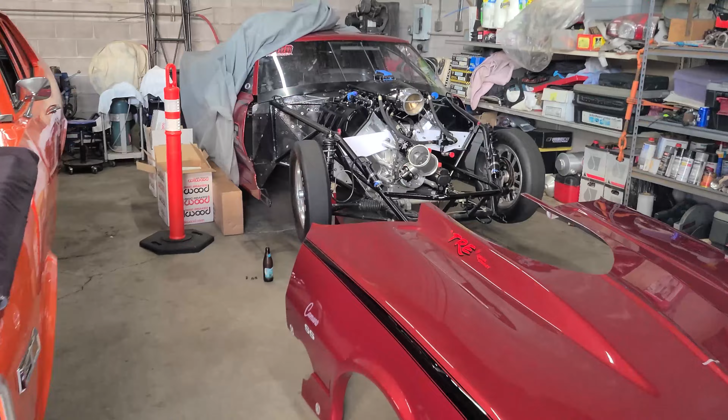All right, we're down at Royden's Auto Service, and the next project that we're going to do is make some motor plates. All right, let's see what we've got going on here. So it's just a small two-bay shop. He's doing some nice Wilwood brakes on an old Nova, and then our project back here is a little Brad Anderson motor going in a Camaro.

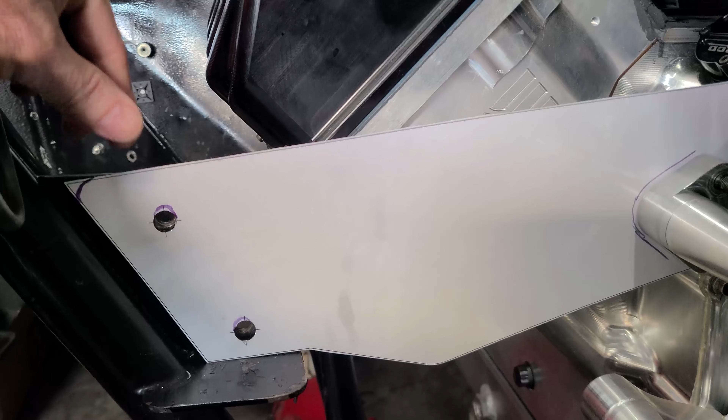So you can see what we've done. This is the second iteration of the little paper template. Made a couple of slight adjustments here on the hole locations, and we're going to cut this out of a 1/2 inch thick piece of aluminum and make some motor plates.

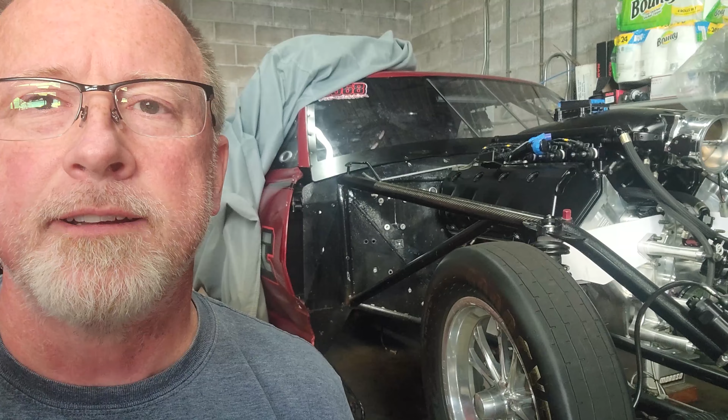Okay, so we're going to have much more in depth about this car and the original OG Crazy Rat that this guy replaced. So we'll talk more in a future video about those two cars and the drag scene here in Hilo, Hawaii. Royden's Crazy Rat Wong.

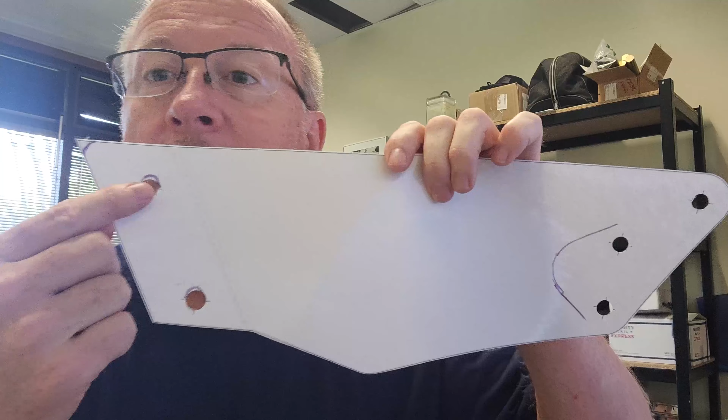All right, we're back here in the office, and we've got our little paper templates that we made some marks on, some minor adjustments, and we're going to show you how I got to this point with these paper templates, and then beyond that, how we get our final, and then go out in the shop and cut them.

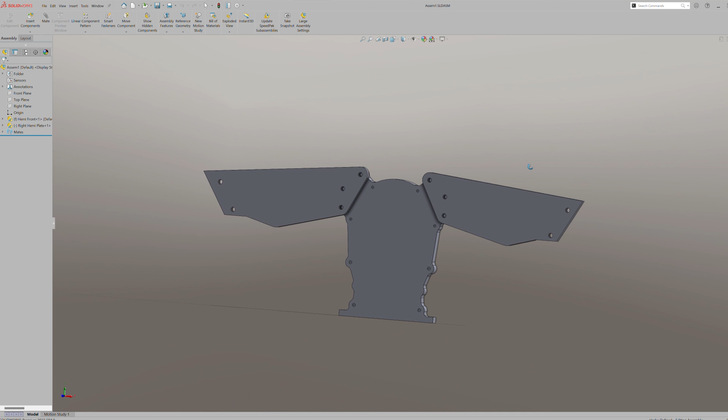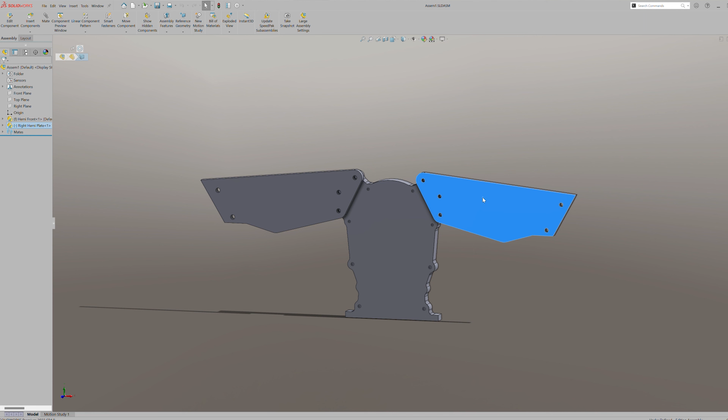All right, so you can see here. Here's the model, front of the block. This is just standard Hemi stuff. The Brad block is standard Hemi stuff. I'm not sure about any of the others, but the Brad block is standard Hemi. So we drew the front of the block, and then if I open up these guys, here's the motor plates, and then if we go over and look at the sketch and edit it, well, I started with a piece of material big enough to fit,

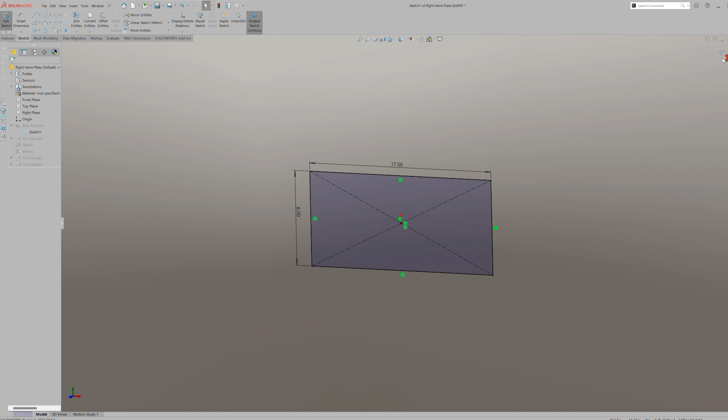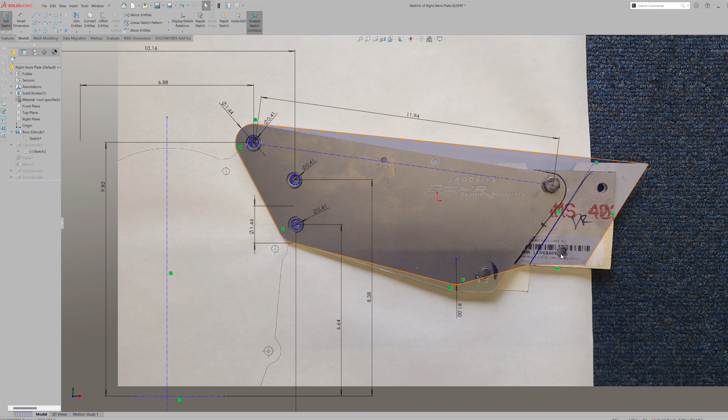And what I did was take a picture of it, scaled it, oriented it properly so that it would fit the three holes on the block, and then sketched around everything. So this was solely driven by a picture sketch, basically. So yeah, that's how we did all that. And when you exit sketch, you end up with that part right there. And now what we have to do is make a few changes. Just polish it up a little bit, and we should be good to go. And I'll show you how I do the next step.

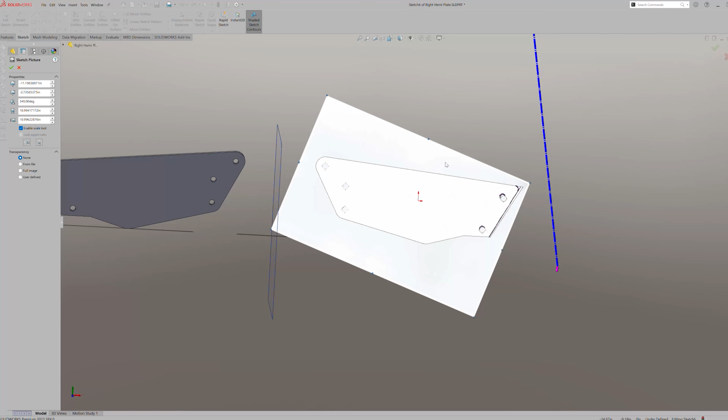Okay, so here we can see the sketch. So what I did was I just scanned this guy. Took him over to the scanner and scanned him. It just so happens it fits well on 11 by 17, which is kind of the max size for our scanner. Scanned it, converted it to a JPEG because it came in as a PDF, imported the JPEG, scaled it, and here you can see what's going on.

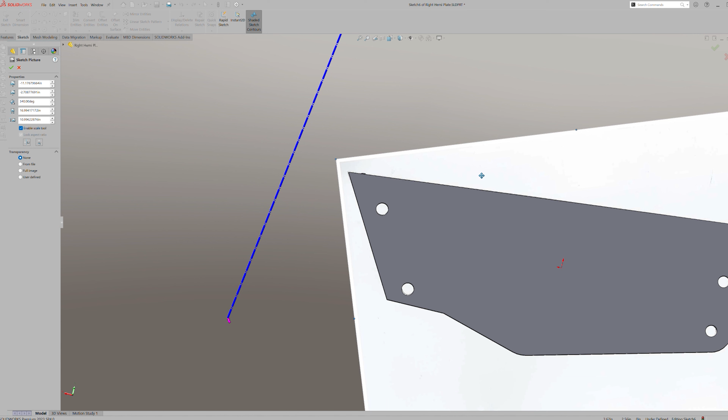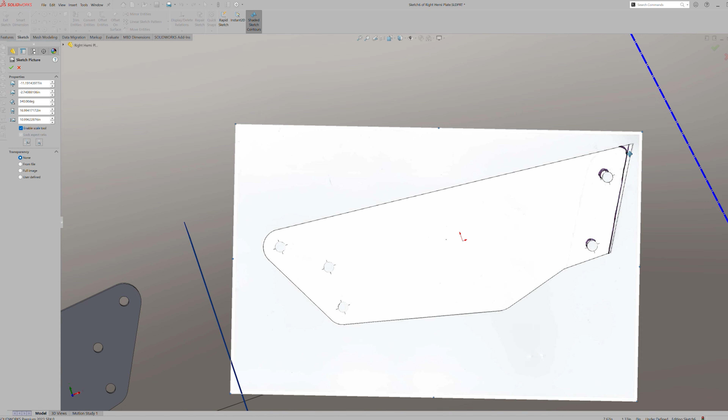So the scan, the JPEG, lays on the top surface. It is right there. You can see it from both sides, right? So all we do is drop this down, get him to fit well line to line, kind of like that right there. And then what we'll do is come over to this side, make a sketch, and we'll move those holes ever so slightly, and then suppress the other holes. Maybe trim off this edge like I've got right here. Trim that edge off, and away we go.

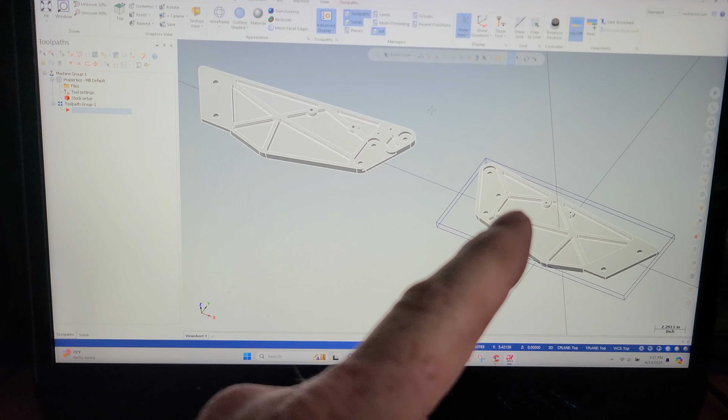All right, we got the design work done and brought it into Mastercam, and I've assigned some stock to this side of it at least. What we'll do is make all our tool paths on this piece. We'll cut this piece out, and then we'll reassign the stock over to this piece, move it up to its origin where it needs to be. And then for all my tool paths, I just have to pick the geometry over on this guy, and everything should be the same. Anyway, that's the theory.

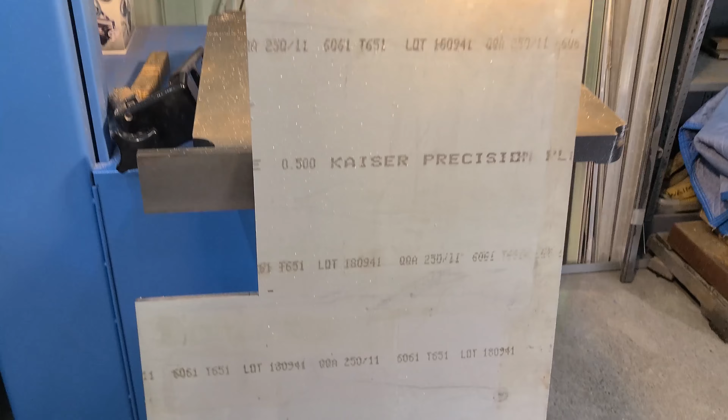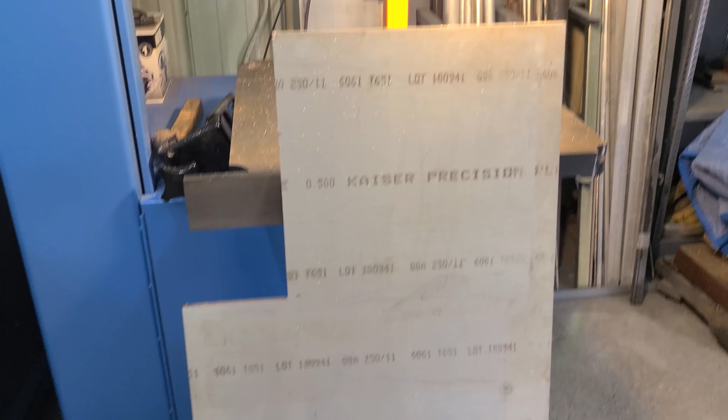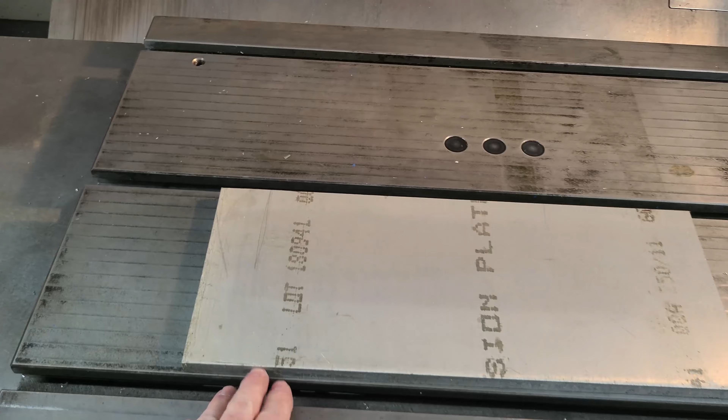There we go. We got a big chunk of Kaiser, 1/2 inch thick. So I've got everything, lot number, everything. Not incredibly important for this piece, but big piece right there. The cool thing is I should be able to toe clamp this down from side to side, have it sit up on 1-2-3 blocks, and then just move these clamps around and chop out the outer shape, and then, while never releasing it totally, just grab the edges and scoop out the little bits for light weighting. So that is the plan.

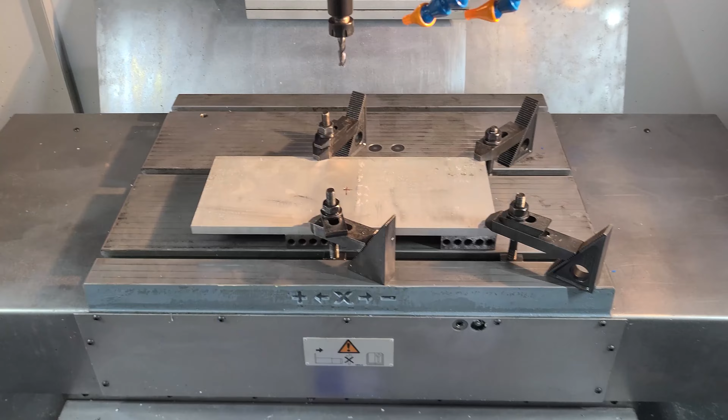So here's the first setup. All I did was visually align this edge with this surface right here on the table, marked the center, picked up the center, set that as XY0, touched off a tool, just barely skimmed the top, and that was Z0.

And then what we're going to do is come in and cut basically the end of this out. We'll move these clamps to the end, and then we'll do these guys in the opposite, right? We'll cut this end, and then we'll reclamp back here on the cut portions, and then we'll cut the sides out. And then, because we'll be grabbing just the very edge, we'll be able to do everything in the middle in the next setup after that.

Okay, here's the first setup on Mastercam, and basically I'm taking short, little shallow depth of cut, 80 thou, because this is hanging off and it's totally unsupported. 80 thou, I don't know how many passes it takes to get through that, but then one last 15 thou cleanup, and then like I said, we'll grab the end of this, and then we'll release these guys on this end, we'll move them in, we'll cut all this out, and then we'll grab this, and then we'll cut the centers out.

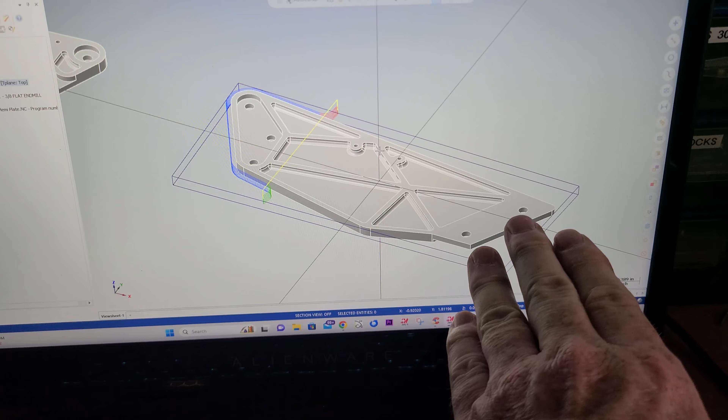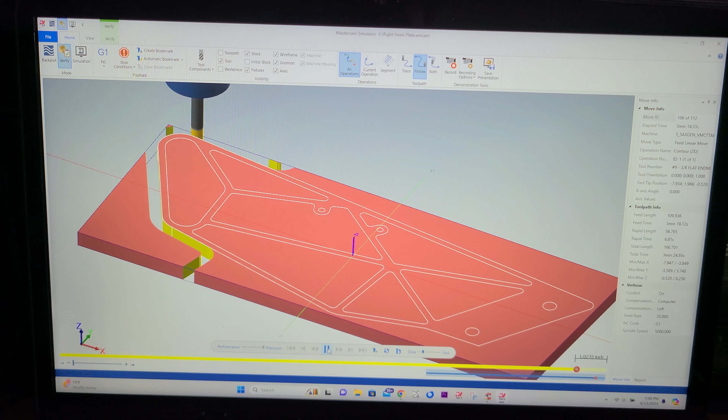Alright, I don't know if I've ever shown this before, but I've never crashed a machine. I've always used Mastercam. I kind of attribute it to that. So what does it for me is to verify. And here you can see the stock I've set up, and I can just run the program basically. And I'm sure Fusion does the same thing, but you know what? I've never crashed a machine. So there you go.

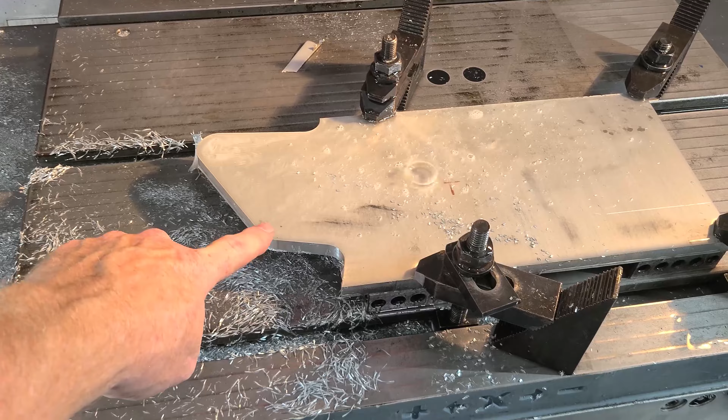So now we just post and send it to the machine, and we're making chips. There it is. First op is done. Now we're just going to move the clamps to something over in this neighborhood, and then move these guys over here. And then we can cut that end.

Alright, so everything's done. Part is cut out. I've got 2 holes for the chassis bored in, and everything's a little bit of bench work on the back side of this guy. I'm gonna hit this on a sander and just break this edge. It'll look really nice when it's done, but I did do a 20 thou little 45 all the way around this part.

Now what we have to do is where the bolts are that hold this down to the motor, we have to surface a flat area down to, this is 1/2 inch material, we got to go down to 1/4 inch. Because everything was designed for a 1/4 inch motor plate, I'm just adding some rigidity to this part and lightweighting it according to the design. So anyways, we got a pocket, and we're going to finish the edge in the same 20 thou little 45. So that's next. Then we'll punch the holes in, and we'll move these guys out to just grab this edge, and then we can do all the rest of this in one shot.

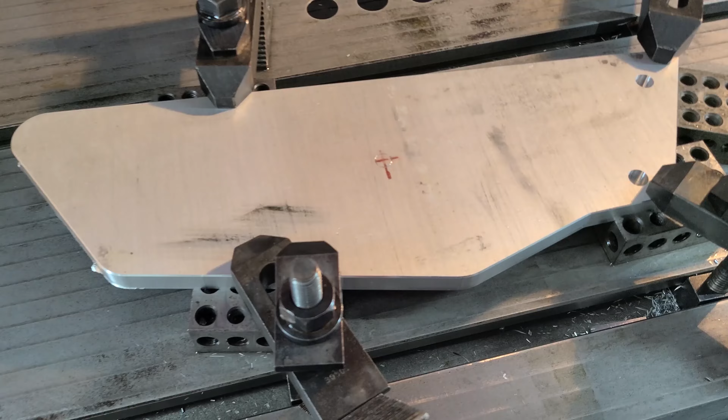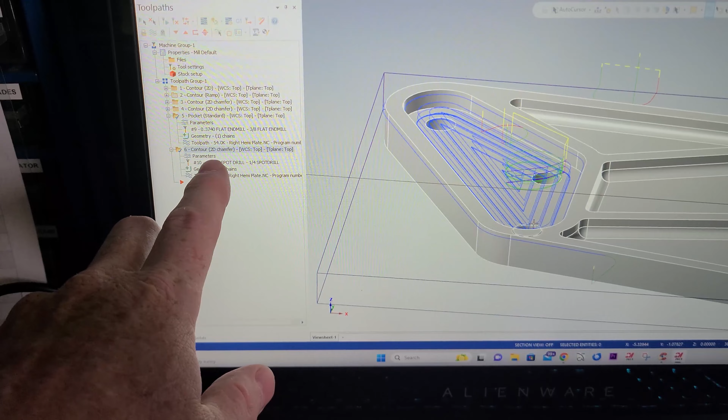And here's the cam. It's just a simple pocket, like 3 step downs, you know, because this is unsupported out here. And then a bunch of cleanups, both on the wall and on the floor. And then of course we come in with a little spot drill and fix up the edge all the way around.

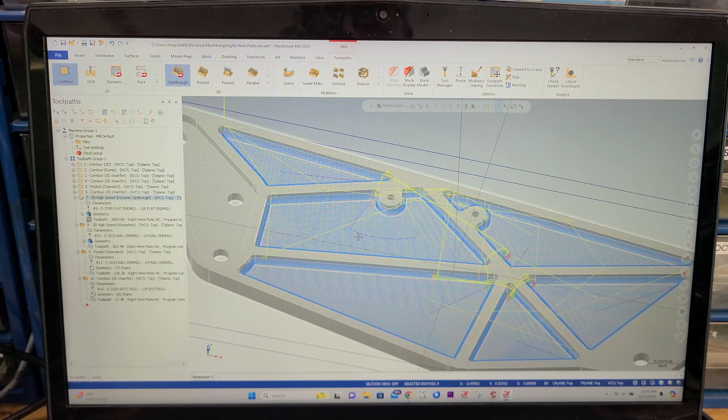All right, here's the cam for all the pockets that are cut in there, and yeah, it's just a high-speed dynamic OptiRough. Get most of the material out, and then we follow up with a waterline cut to do the walls, the edges, and then I do a pocket, and that gets us this super pretty, you know, kind of textured pattern that matches a lot of the stuff that the automotive aftermarket's doing now.

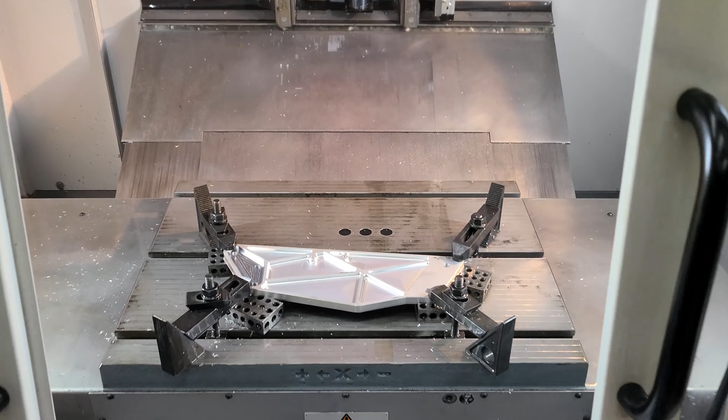All right, so everything's done on this guy for the front side. The back side, all I have to do is put a 189 thou notch in the back where the tab on the chassis has to seat in, so we get the proper depth. So basically all I'm going to do is indicate in this surface, this flat surface, and then set the thing up, you know, indicate that in, and then just make the cut on the Bridgeport. It's easy enough to do it that way.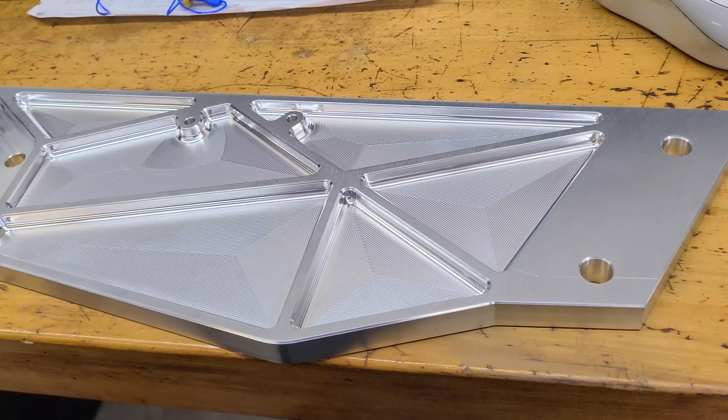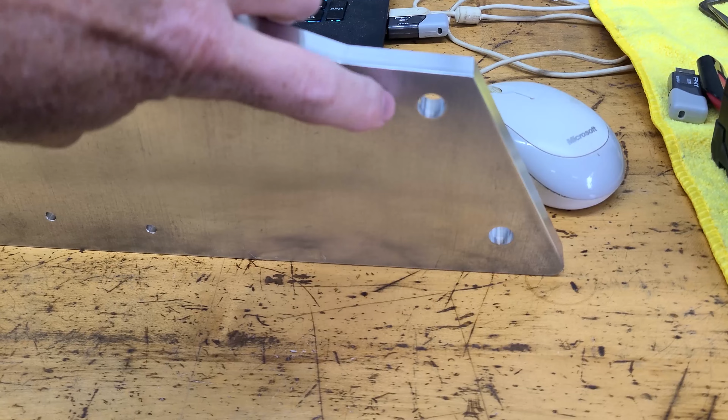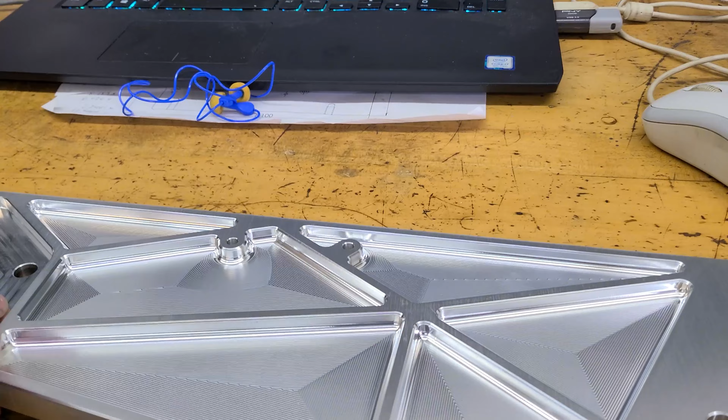Then a little bit of hand work, cleaning this up, brushing the finish out here, and this guy's ready to go. All edges relieved, got the holes punched in there, and yeah, this guy's ready to ship. There we go. Nearly finished. The one thing I have left to do, like I said, backside, just notch this out. Basically, it's going to look like that right there. 190 thou deep little pocket. That's what we got. All the edges are broke. 20 thou on the outside, and on the inside pockets we got 30 thou chamfer.

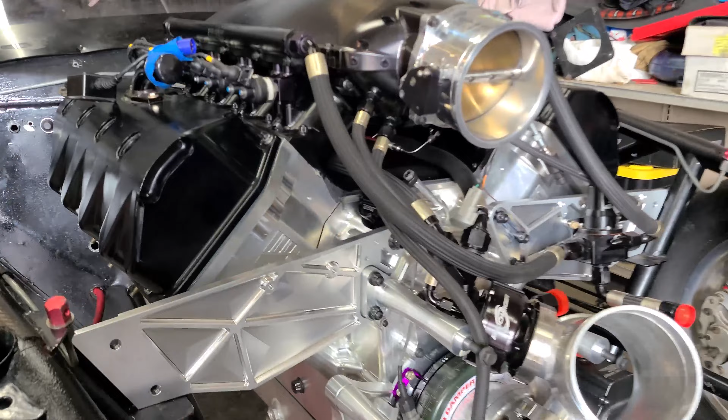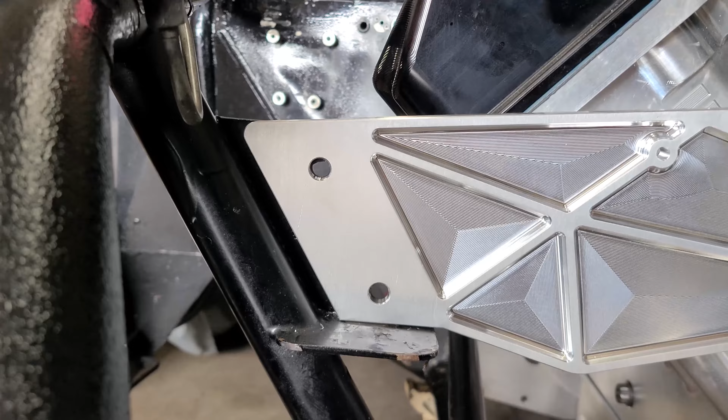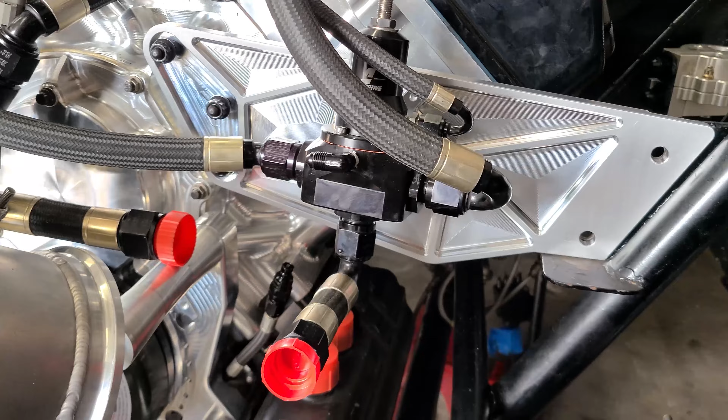All right, the brackets are mounted on the engine. Motor plates on the Brad Hemi. And all of our holes look like they line up pretty darn good. This is for a breather for the ProCharger. These mounts right here, this is for throttle cable. And then over here on this side, this is obviously fuel regulator. And that guy bolts on to those holes up there.

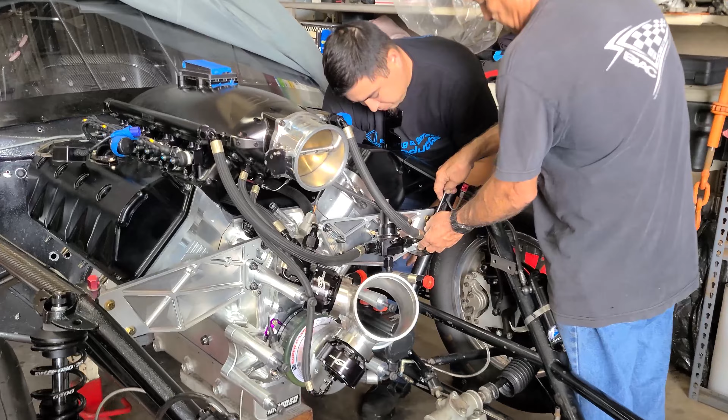All right, so that's the workflow. That's how I do it, anyways. We start with the motor plates that came on the motor, and then the guys kind of scabbed on some little brackets to give me an idea. I took the picture, I converted the picture into a JPEG, put it in SolidWorks, scaled it, aligned it, did the drawing, and then we did paper, printed 1-to-1. Took 2 visits to actually get the holes to line up like they do, but everything's good now, and that's the workflow.